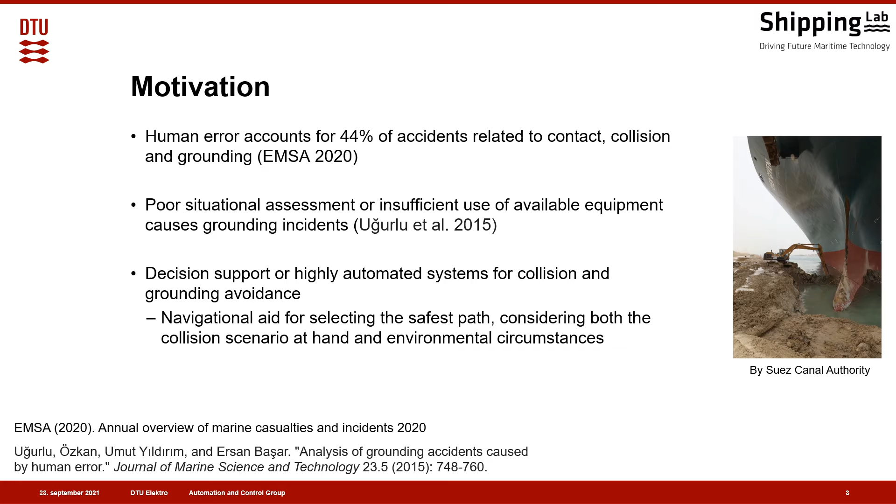Technical University of Denmark. An annual report by the European Maritime Safety Agency shows that human error accounts for 44% of all accidents which relate to contact, collision, and grounding. Furthermore, another study showed that grounding incidents often occur due to poor situational awareness or assessment, which also relates to the suboptimal usage of available equipment on the bridge. A prime candidate for reducing or completely diminishing incidents due to human error is through highly automated systems or advanced decision support to aid against collision and grounding.

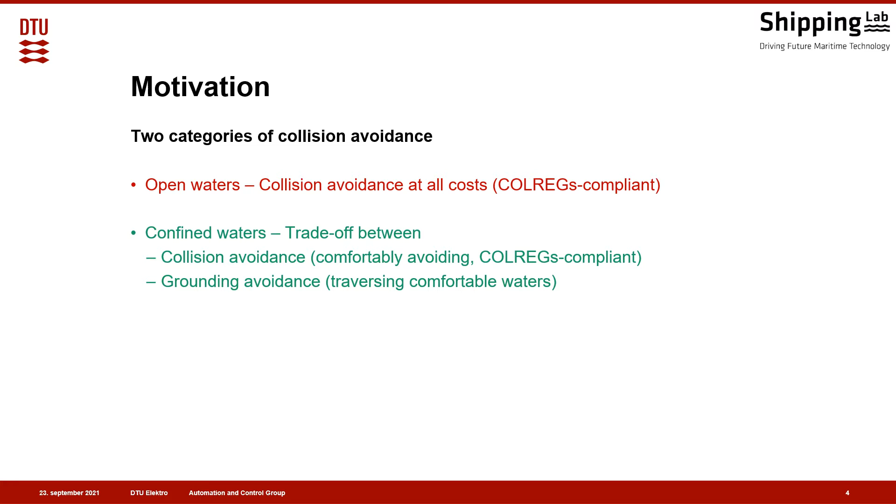There are two main categories within collision avoidance: open water and confined water collision avoidance. During open waters, the vessels have to some extent unconstrained possibilities for avoiding a potential collision situation due to the open playing field. At open waters, collisions are avoided at all costs while adhering to the COLREGs. However, doing collision avoidance in confined waters, there is a trade-off between both avoiding collisions while adhering to the COLREGs and also while trying to avoid grounding. This paper has an emphasis on collision avoidance in confined waters.

The paper presents two central contributions. Firstly, the paper presents a marine-oriented sampling-based motion planning framework for operating in confined waters. A sampling strategy for directly sampling the depth contours is presented in order to increase its efficiency. Furthermore, the framework leverages a specialized grounding-aware cost function. The cost is the second contribution, where based on historical data, the prior best practices of navigators have been quantified. This results in a learning-based cost function which directly encodes navigator-like behavior for traversing confined waters. The proposed framework is then successfully demonstrated on two confined water scenarios.

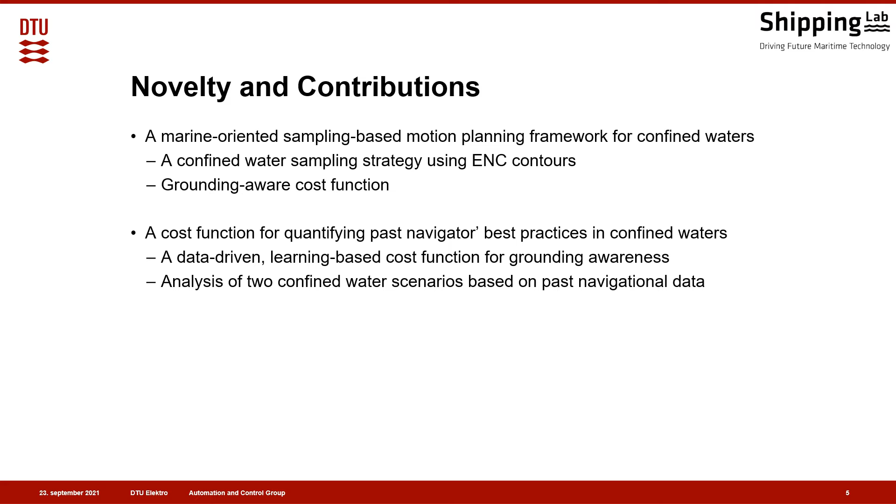It is assumed that own ship is a larger vessel, which is restricted primarily by its draft. It's also assumed that the vessel has an underlying track control scheme which utilizes waypoints. The target vessels are assumed to maintain constant course and speed whenever they're in a stand-on scenario. Furthermore, an elliptical comfort zone is placed around a given target vessel to describe a no-go zone.

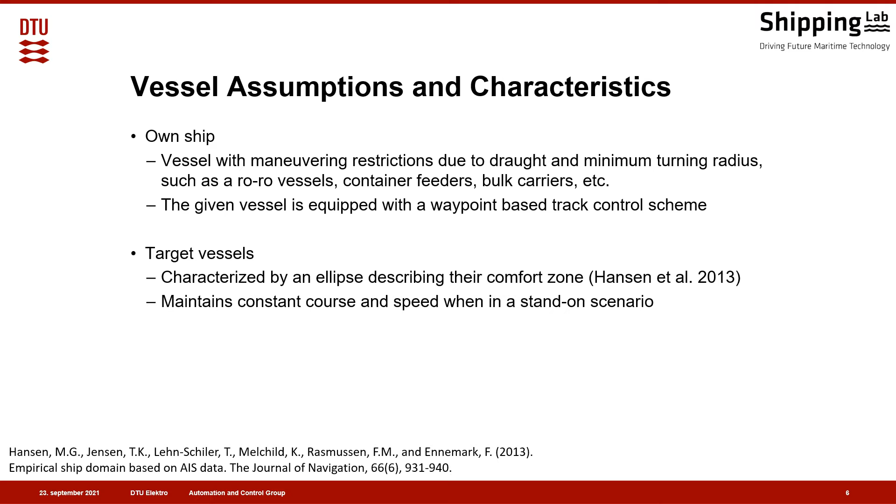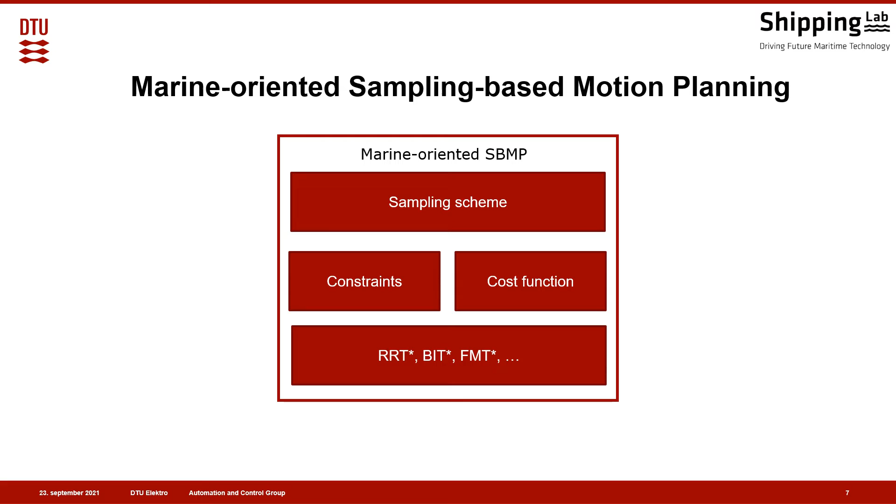The coming slides will revolve around presenting the four building blocks of the before-mentioned marine-oriented sampling-based motion planning scheme. First, the proposed sampling scheme will be presented in detail, then the constraints which lead into the grounding-aware cost function, and finally some high-level information regarding the optimizer. It's important to note that the proposed framework isn't exclusively meant for RRT*, but will work for any optimal sampling-based algorithm such as batch-informed trees or fast-marching trees.

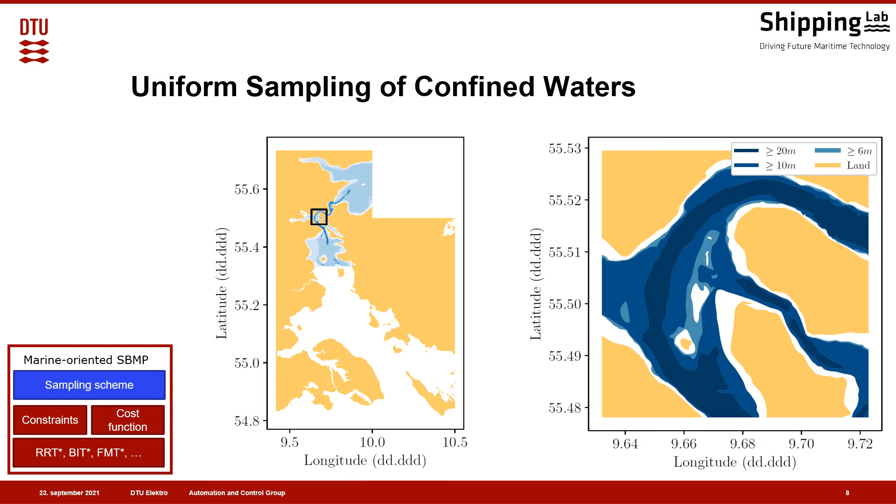Firstly, the proposed sampling scheme. This slide shows the extraction of real ENC contours. The leftmost figure is the extracted contours once a geofilter has been applied, where the right figure shows the cropped contours. The yellow region indicates land, and white indicates shallow waters for drafts of 6 meters or less. Therefore, for a vessel comfortable with sailing at a depth of 6 meters, all the blue contours are valid. As you can tell, this region is highly non-convex with several holes.

The state-of-the-art in sampling-based planning for marine systems is to simply sample the rectangular approximation of the area. This, however, is highly inefficient, primarily due to the rejection rates as the ratio of shallow waters to feasible waters change. We instead propose directly sampling the depth contours. Since the polygon data is directly available from the charts, one can apply techniques from computational geometry. The feasible depth contours are joined into a single non-convex region with holes, which is then triangulated. Each of the resulting triangles are then uniformly sampled by area and each selected triangle is then uniformly sampled. This requires 3 calls to a uniform distribution compared to the usual 2.

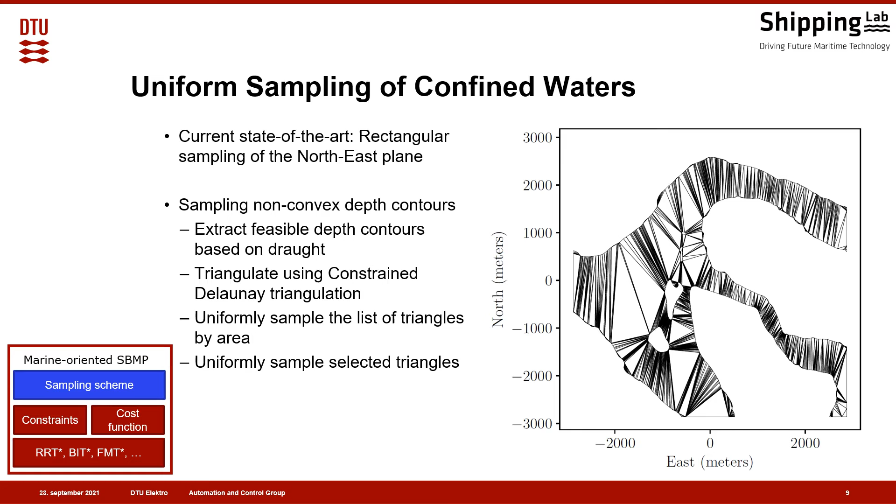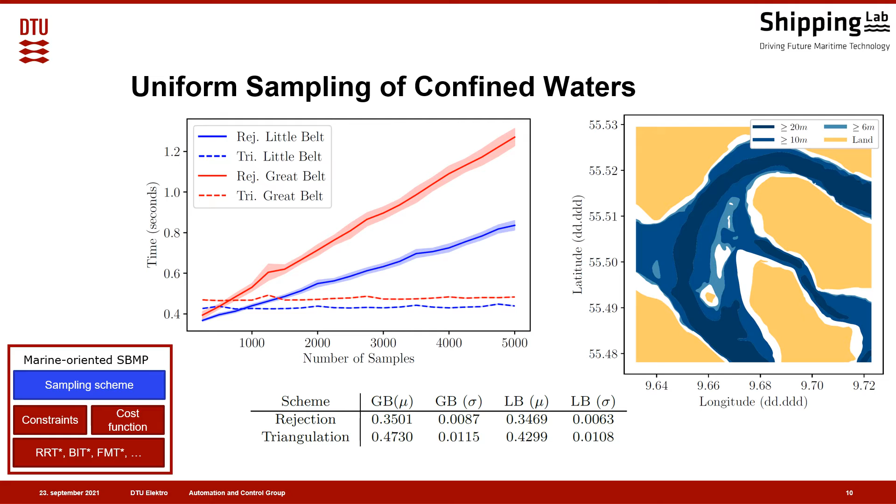However, despite an additional amount of computation time for both generating and sampling the triangles, once the triangulation has occurred, the efficiency of the triangulated scheme significantly outperforms the regular uniform sampling scheme. The table below compares the setup time for the 2 sampling schemes within 2 separate regions. The blue curves compare the performance of the triangulated scheme to the rectangular uniform scheme on the environment shown on the right-hand side. Here the ratio between the rectangular approximation and the feasible depth contours is 2/5. The triangulated scheme is close to constant since all samples which are generated are guaranteed to fall within the region, whereas the rectangular scheme must reject a majority of the samples.

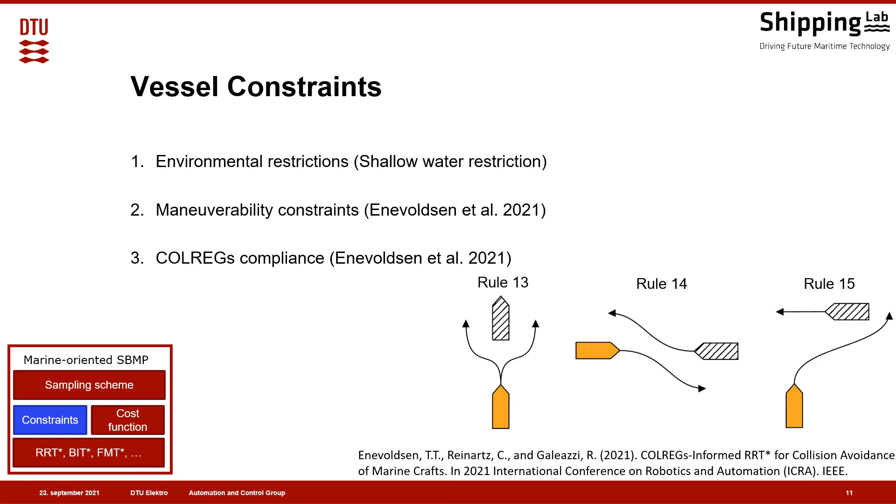Now that the sampling scheme has been selected, the next part of the framework is to consider the system constraints. The collision avoidance problem has 3 major constraints: environmental restrictions, maneuverability restrictions, and COLREG compliance. The first of which is dealt with by performing point-in-triangle tests along the computed path. This ensures that all paths are feasible with respect to the depth contours. The second is achieved by constraining the distance between 2 subsequent waypoints, as well as maintaining a minimum angle between the 2 legs. And finally, COLREGs compliance is achieved by rejecting samples that create a rule violation. This is primarily achieved using relative bearing and CPA and TCPA. Please see the listed reference for further details regarding the maneuverability constraints and the COLREG compliance.

Exploiting AIS data for encoding behavior has been explored to great extent. It's a very hot topic at the moment within both trajectory and behavior prediction. We instead propose utilizing the AIS data to encode a region of safe passage and thereby encoding the best practices of previous navigators into our cost functions.

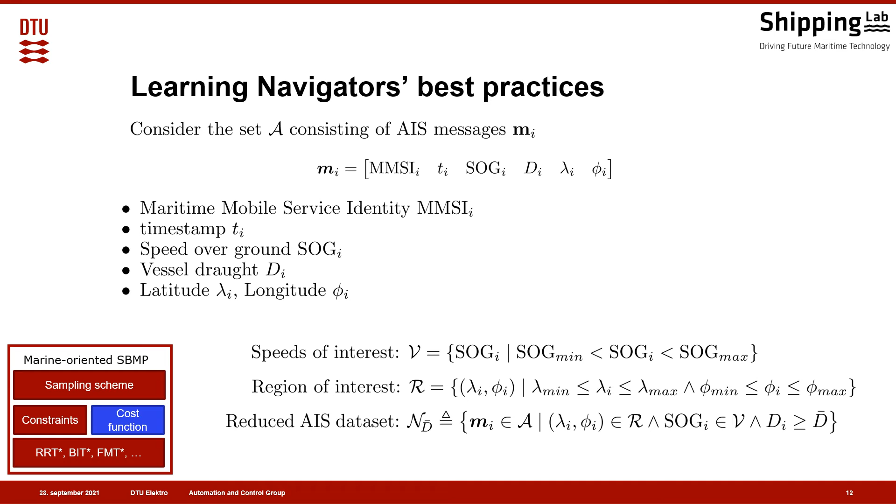In order to do so, we require a set of AIS messages as given on the slide. Each message consists of the listed entries, with the most essential for our purpose being the coordinates and draft. We limit the set of AIS messages based on speed to exclude stationary vessels as well as rescue helicopters, and by geographical region.

The reduced dataset is then used to compute a multivariate kernel density estimate, which is in this case a 2-dimensional KDE. The KDE is a non-parametric estimation scheme which estimates a distribution f, which the provided data is sampled from. This distribution is of course unknown. For such a KDE, the choice of kernel function k and bandwidth matrix h act as tuning parameters. We chose the commonly utilized Gaussian kernel and then hand-picked the bandwidth based on the chosen geographical region. The resulting estimate of the underlying distribution f hat is then given as in the marked box below.

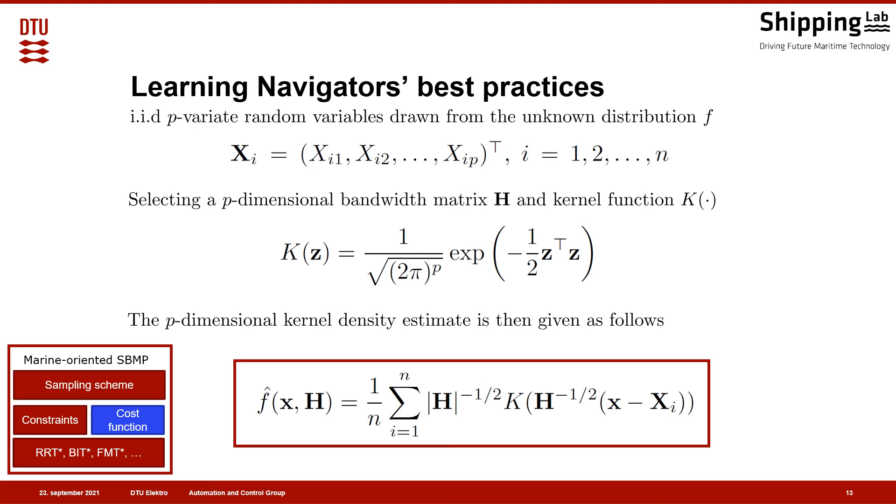This slide shows how the kernel density estimation has been applied to the selected AIS data. This example is from the Little Belt area in Denmark, and also in the paper a case study from the Great Belt area is included. The left figure shows the raw AIS data, which is captured over a 1-year period within this area. The rightmost figure shows the computed KDE, which uses all the data points from within this region where the draft is greater than 3 meters. The blue contours show the corresponding feasible water regions, whereas previously the white regions are shallow waters and the yellow regions are land masses.

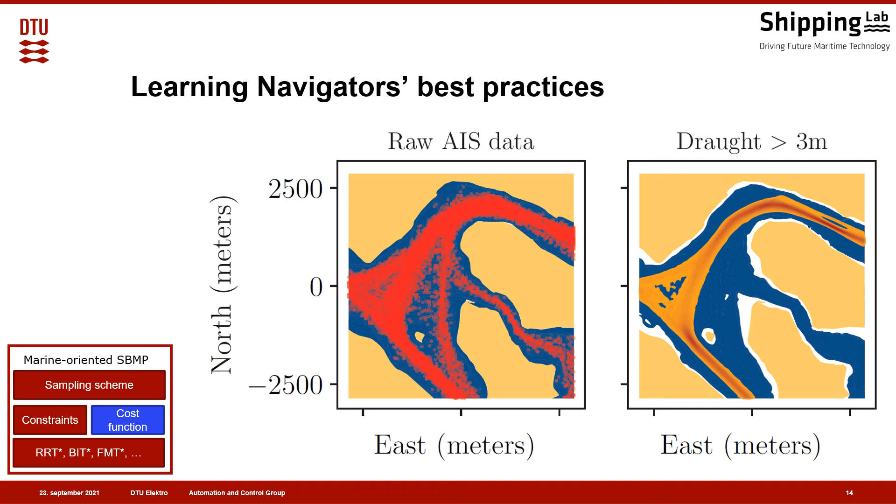As we further constrain the draft, it is clear to see that a navigational and behavioral pattern is emerging. As the draft size increases, the vessels maintain a greater and greater safety margin from the shallow water contours. It is also clear to see that most vessels follow the same path on the west side of the shallower water region in the center.

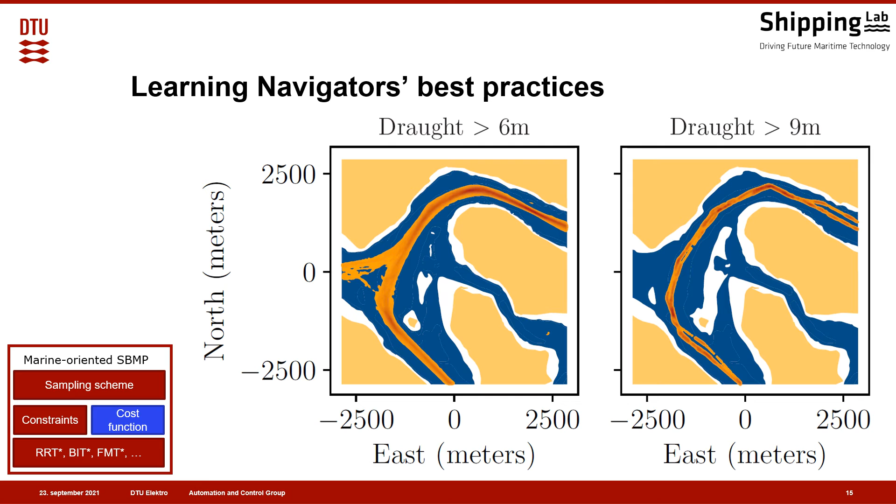The proposed sampling scheme and KDE-based cost function can then be combined with an existing sampling-based motion planner such as RRT star in order to create what we call the grounding-aware RRT star algorithm. As previously mentioned, RRT star is just one of many possible algorithms for solving the generalized optimal sampling-based motion planning problem. The overall inner workings of RRT star is then presented in algorithm 1, where our proposed sampling scheme, constraints, and cost function modifies the relevant parts.

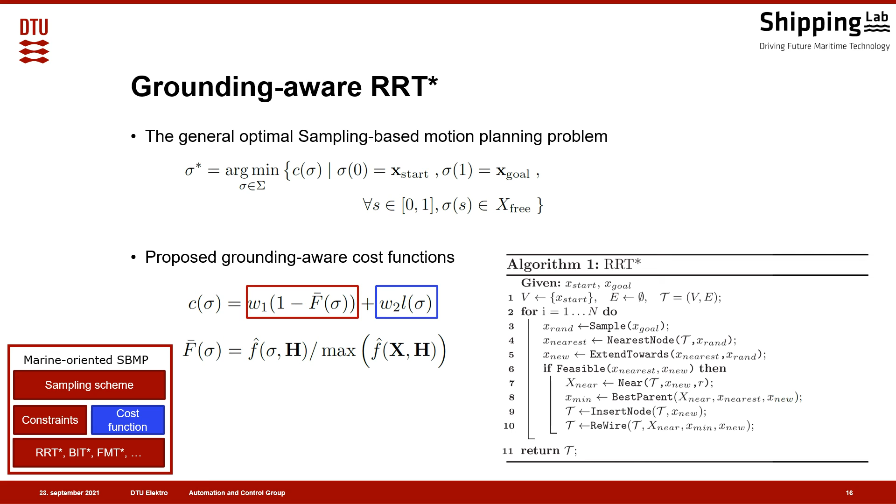The cost function consists of two parts, namely the minimization of the path length, which is shown in the blue box. This is given by the current path sigma evaluated with an L, which is the Euclidean distance, and the grounding awareness, which is given by the red box. This is then the current path evaluated in the computed KDE. Each term is then scaled by omega 2 and omega 1 respectively, which represent scalar weights.

We then evaluate two scenarios where this grounding-aware RRT star is used for collision avoidance. The left figure shows the case study from the Great Belt area, where the own ship is southbound and a target vessel is northbound. The yellow trajectory is the optimal trajectory if only path length is considered as an optimization criteria, where the green trajectory combines both path length and KDE. The yellow trajectory, as expected, completely disregards the potential navigational safety hazards of navigating too close to the contours, whereas the green remains within the center of the feasible area throughout most of its journey. Both trajectories obey the COLREGs in the head-on scenario and adequately perform a collision avoidance maneuver.

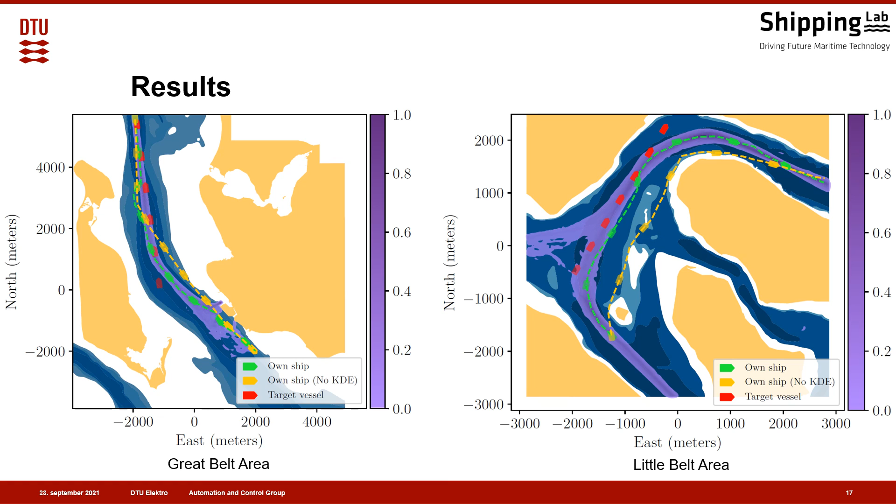A more interesting case is the one from the Little Belt area. Here the yellow trajectory computes an obviously shorter path, but this shorter path is clearly unsafe and poses a huge risk of grounding. Using the information within the KDE, the proposed method is able to remain safe whilst also performing this COLREG-compliant overtaking. And it also remains within the region deemed safe by past navigators. For this final scenario, it's very obvious that the information encoded within the KDE is an overall behavioral trend, since the KDE contains no information about going on the east side of the small island at the center. It instead moves all the traffic west around.

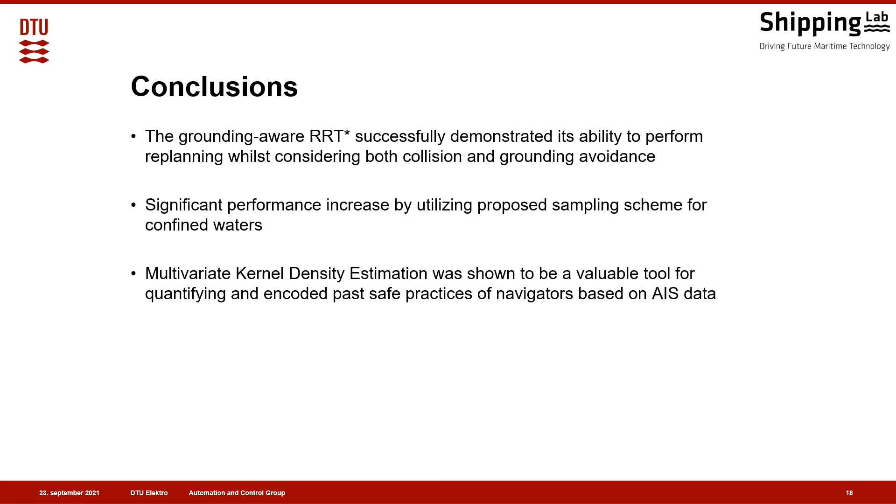And finally, to conclude, the paper proposes an optimal marine-oriented sampling-based algorithm, namely grounding-aware RRT star, which successfully demonstrates the ability to perform both grounding and collision avoidance. The proposed sampling scheme for confined waters shows a significant performance increase over the traditional rectangular sampling scheme. We are convinced that for even more complicated confined water scenarios, triangulating the depth contours will provide a significant performance boost. Furthermore, it is shown that multivariate kernel density estimation is a valuable tool for both quantifying and encoding the past experiences of navigators. This use case scratches the surface of potential ways of exploiting past experiences for grounding awareness.